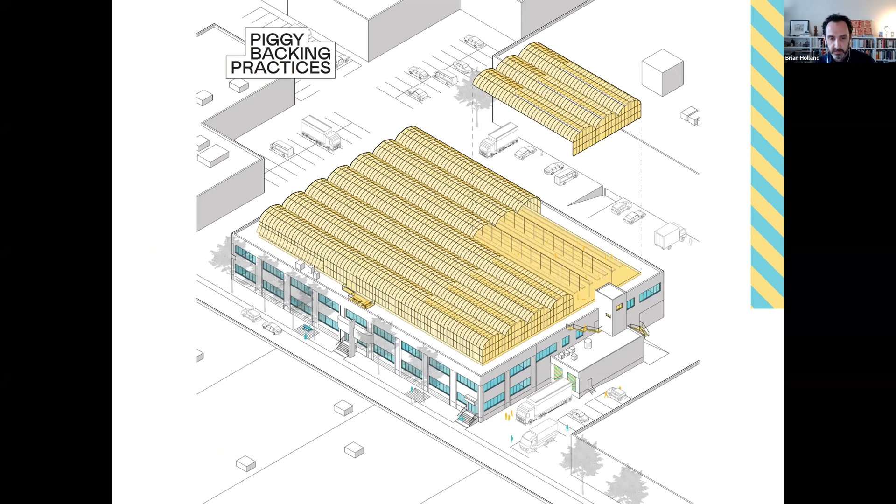Diverse actors forge surprising alliances as they negotiate access to space, resources, and opportunities in crowded cities. These, in short, are piggybacking practices: asymmetrical, multi-use propositions for anchoring socially or economically marginal activities alongside dominant ones. These practices are best described by example: rooftop agriculture, market rate condominiums with basement artist residencies, and student-senior home shares are just a few.

Just a few of the 21 case studies forming the basis of the online exhibition that accompanies the symposium. The exhibit and the symposium are part of an ongoing research project seeking to answer the following questions: To what contemporary cultural and economic pressures are these piggybacking practices responding? Who are the agents? That is, who are the piggybackers? Who are the piggybackees? And what kinds of tactics do they utilize?

Note that the case study drawings are illustrated with two colors to reveal the spatial particularities of these unique entanglements.

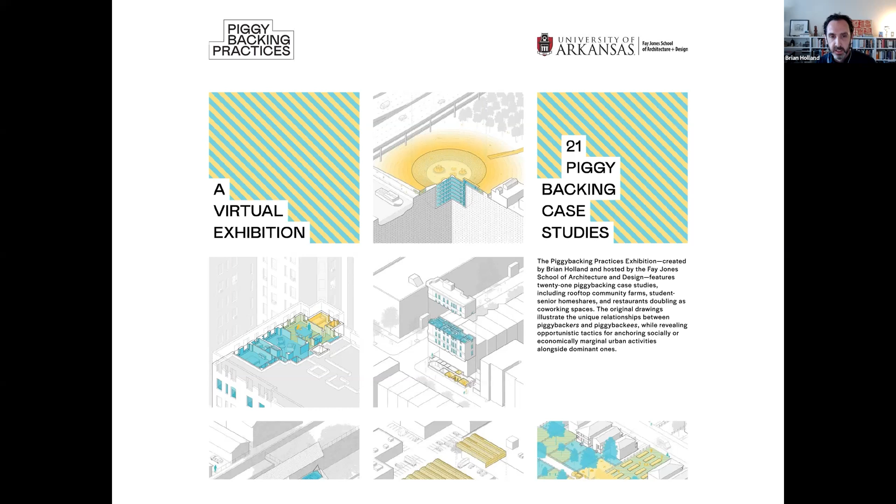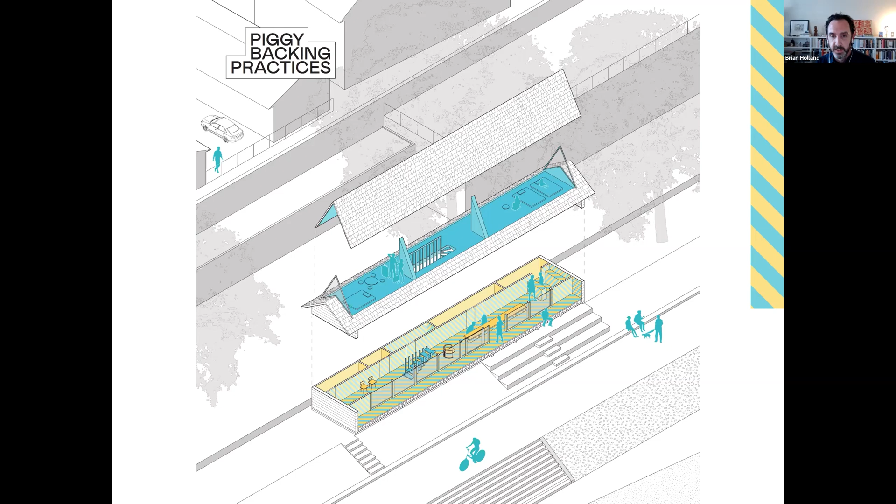Tactically speaking, piggybacking is an inherently opportunistic endeavor and is often born of necessity. Piggybacking practices have become increasingly common in the years following the economic recession of 2008. This suggests they are, at least in part, a response to the intensifying pressures of contemporary market logics. They are emerging alongside widespread increases in social and economic inequality.

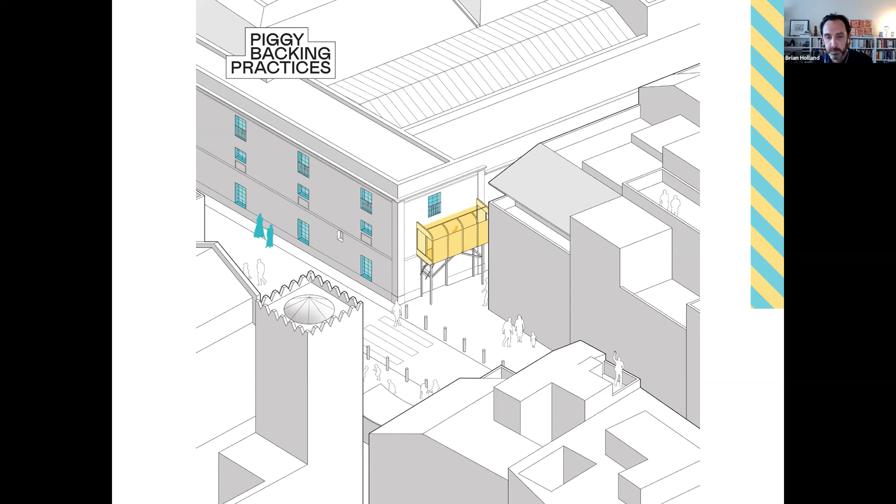Often lacking the necessary capital or land to build in a traditional manner, piggybacking practitioners operate tactically within the space of the other. They scan the urban landscape looking for opportunities in vacancy, waste, and un- or underexploited niches. These opportunities may be spatial, that is, existing in, on, or in between buildings and sites, but they may also be temporal, existing within the daily, weekly, seasonal, or one-time gaps between use and non-use.

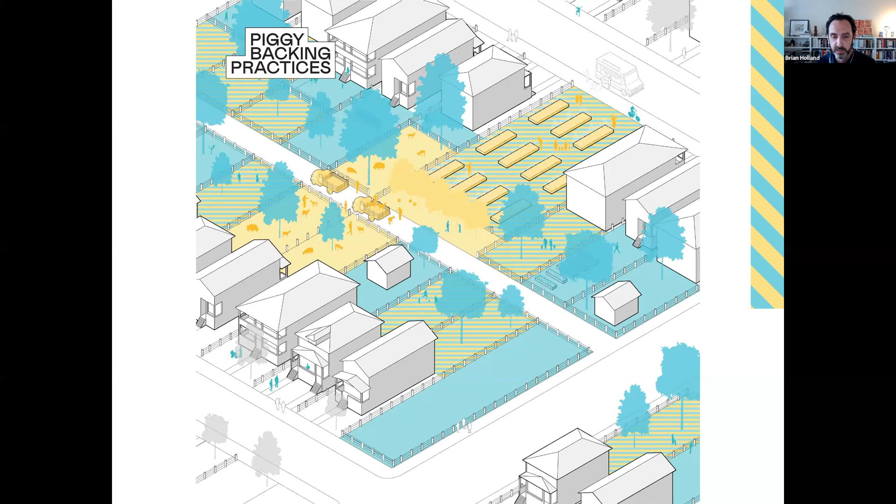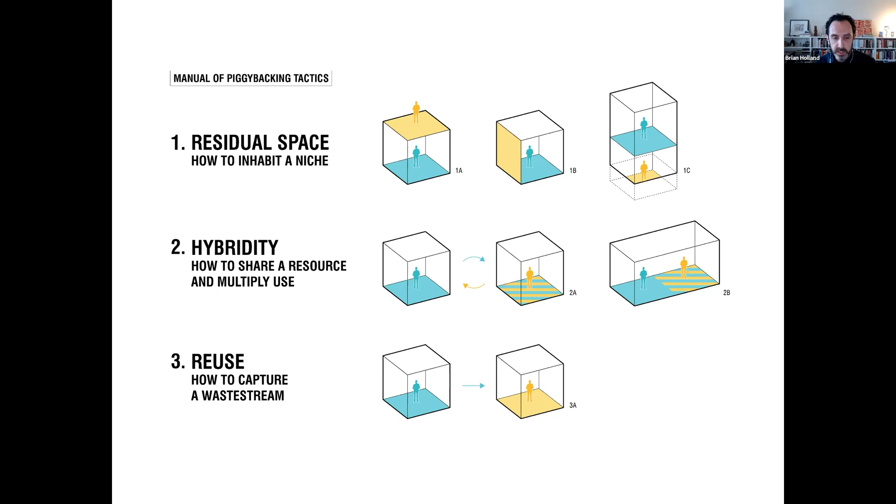In examining the wide range of case studies that make up the piggybacking practices exhibition, a common set of tactics becomes evident. The research suggests that in order to offset one program's disadvantaged position in relation to other, more traditional and more fully capitalized forms of urban development, piggybackers employ one or more of the following tactics: niche inhabitation, leveraging residual spaces on the top row; resource sharing and use multiplication, promoting hybridity on the middle row; or reuse, capturing waste streams.

The nature of any given piggybacking exchange differs greatly depending on which of these tactics is employed. And it's important to note that these are not discrete categories. Indeed, one or several of these tactics may be found in any given project.

But this initial research also points to larger questions, which are crucial ones for us as designers, planners, and advocates working in the built environment, and which I hope we might consider over the course of this symposium. To what ends are these piggybacking tactics typically deployed? In other words, for what larger strategic aims might they prove useful?

When, if ever, are these tactics alone sufficient to achieve these larger strategic aims? And what other practices might they be paired with in pursuit of broader goals, like the expansion of access and opportunity in the built environment?

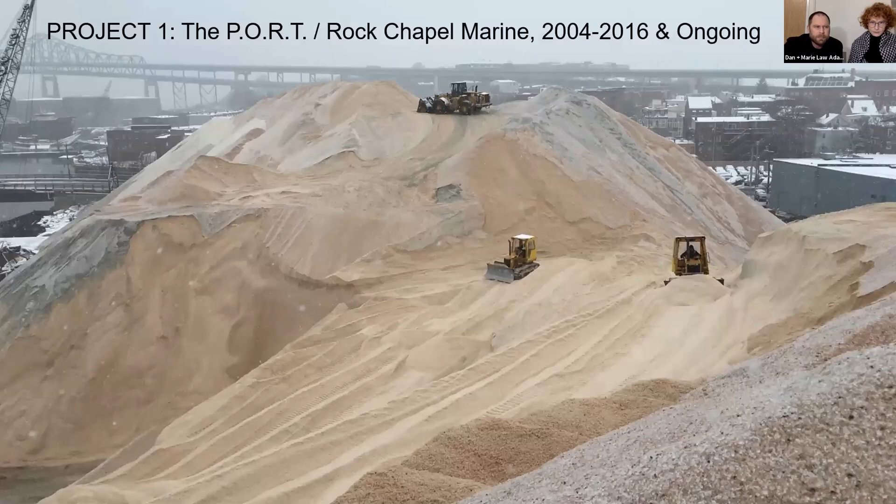So the first project we're going to talk about is what's often known as the Salt Pile, which is located just north of Boston, Massachusetts.

I think this notion of publicness is particularly interesting here. This is a private company and privately owned salt, and yet, of course, this has traveled the world over federal navigation channels. This is distributed almost solely to public Department of Works and highway departments. In this case, this is coming from the Atacama Desert in Chile.

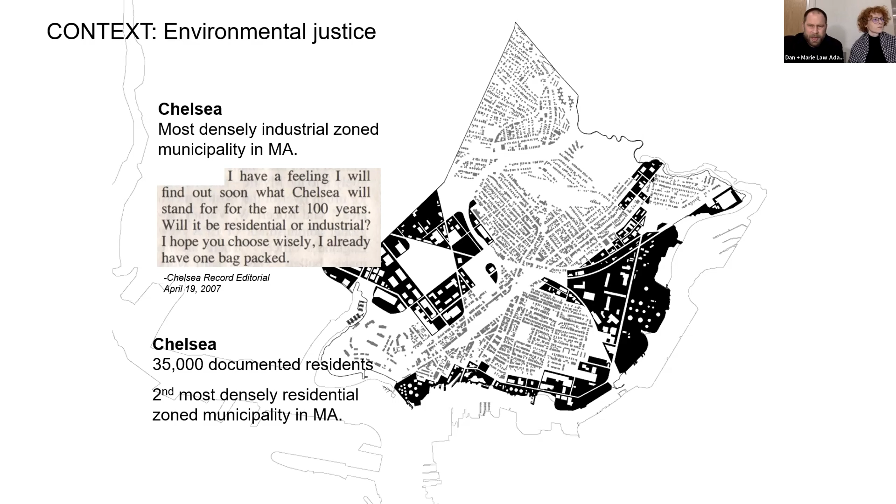It's located in a really complex, severe environmental justice community. It's one of the smallest municipalities in Massachusetts, under 2 square miles, and yet receives about 75% of Massachusetts petroleum product, as well as the vast majority of our salt product. There's this sort of competing hourglasses between 50% of the city being industrial and about 50% being high density residential, many living below the poverty line, many very recent immigrants to the city.

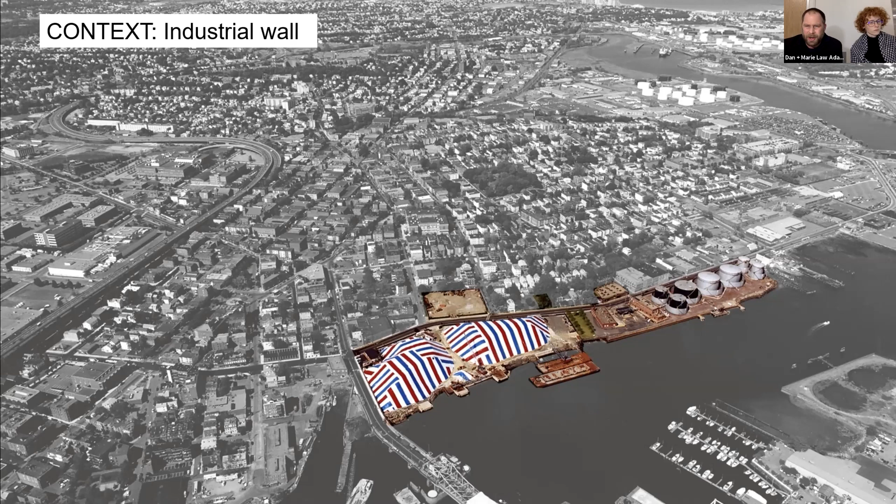That industrial density manifests itself particularly on the waterfront in a complex public circumstance where industry is really a barrier to the public resource of the waterfront. Here, what you see is the territory of the project that we're going to show, which is essentially a salt dock expanding into a former asphalt batching and jet fuel distribution terminal.

Marie cautioned me not to spend much time on this slide. It's the kind of slide you can spend a lot of hours on. The genesis of the project in many ways is a series of contradictions between regulations here at the local level, state level, and federal level.

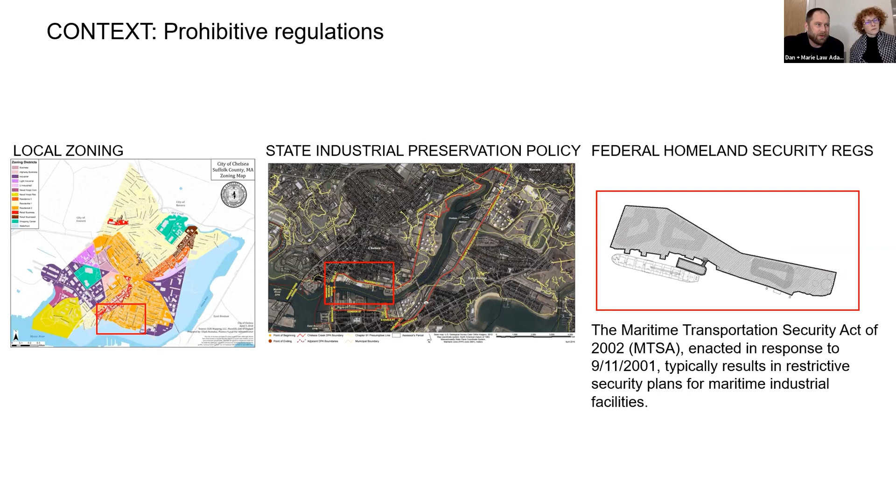At the local scale, it's really a restriction caused by the city's own response to industry, which is to try and prohibit future industrial development. They were so burdened by industry, they crafted a zoning code to prevent it, which directly contradicted state regulations that essentially require only industrial development here. And then you layer in contemporary challenges like federal Homeland Security regulations that make these sites entirely inaccessible to anyone without security clearances.

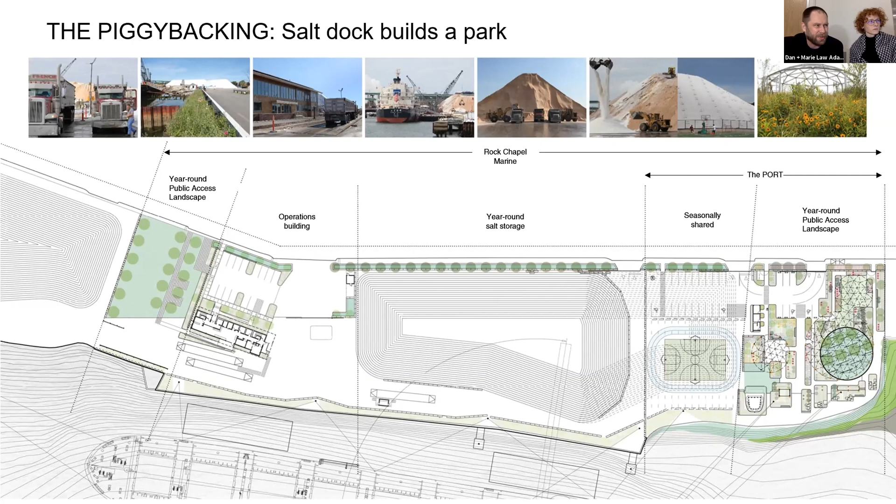The project, what we call the piggybacking, is really the design of a shared use landscape where we try to negotiate public access into active industrial salt operations. You can see on top a series of photos that give a bit of the flavor of the project.

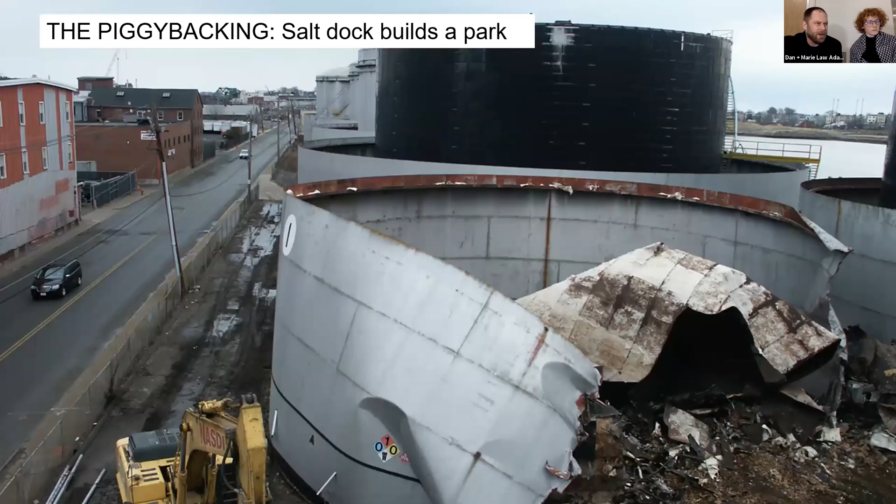There were a few tactics or approaches we should identify to understand the project. One being the recycling of industrial elements, which followed the demolition of the terminal — at the time, a mothballed asphalt batching and jet fuel terminal. Different components of that site essentially got reallocated. You can even see things like the bulkhead of the former oil terminal repurposed as infrastructure for mooring the salt vessels, along with the construction of the headquarters building and the salt stockpiles.

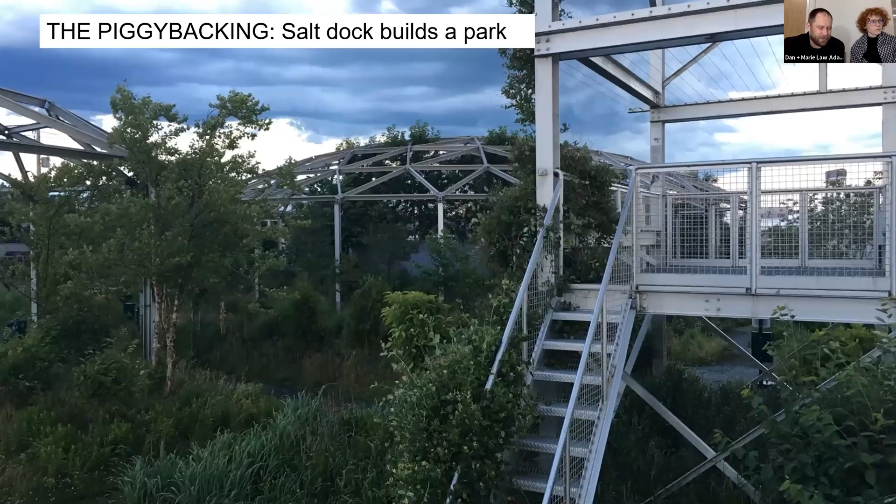One of the first tactics we identified, working through the regulatory agencies, was how to design the park essentially as industry and shape it by the functions of the industrial landscape. We produced drawings for state and federal agencies that basically tried to diminish the park in the eyes of regulators — to say, no, this isn't at all a park, it's a series of infrastructural moves that add up to form a park.

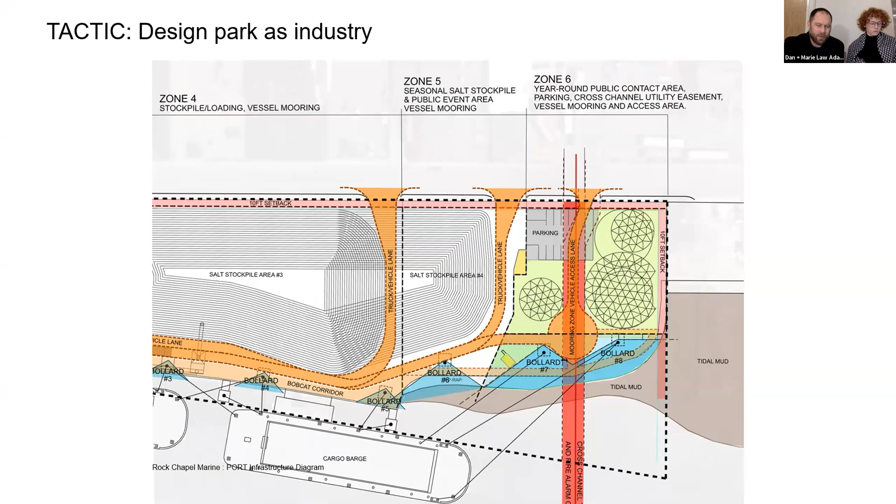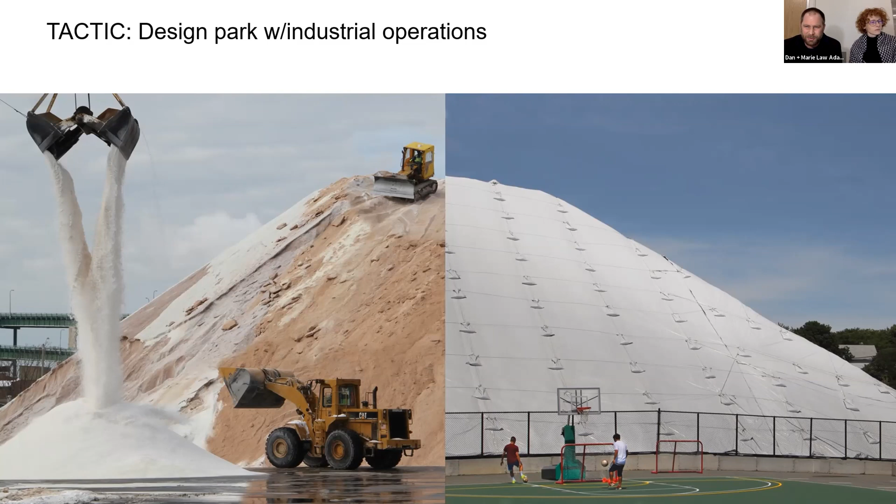Another tactic we looked at: industry is often just generically referred to as 'industry,' ignoring all the particularities. That's something I really appreciated in Claire's presentation — she doesn't do that. The salt pile has a very specific set of parameters, some of which can be capitalized on. Salt in New England is used to de-ice roadways, so it's very active in the winter months. Outdoor parks around here are less used in winter and a lot more used in summer, which creates a nice seasonal tactic.

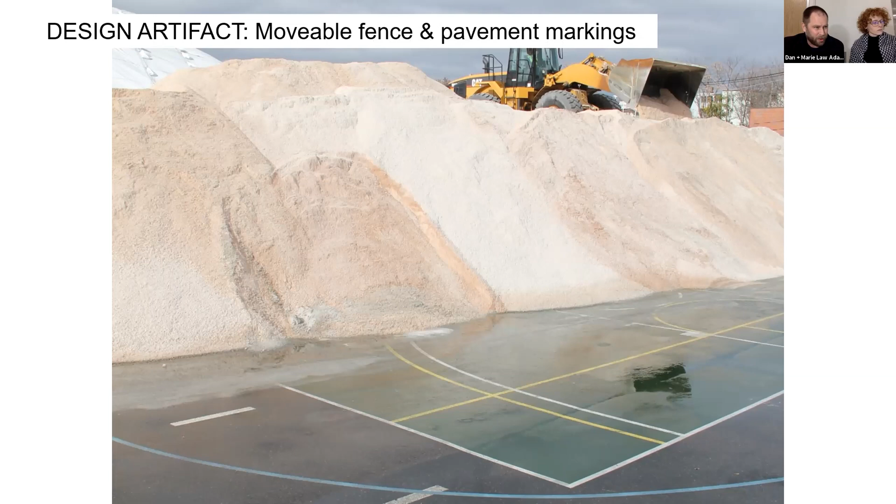Part of the design was to allocate an area that, from the federal and state regulators' perspective, still served its industrial function, but could be softly treated with lightweight infrastructure to condition it for public uses when not being used by industry. So here you see what's become an annual tradition, where the only waterfront park basketball court is annually covered with salt, and then in the spring it's reconstructed through design artifacts, which are movable fences and simple pavement markings.

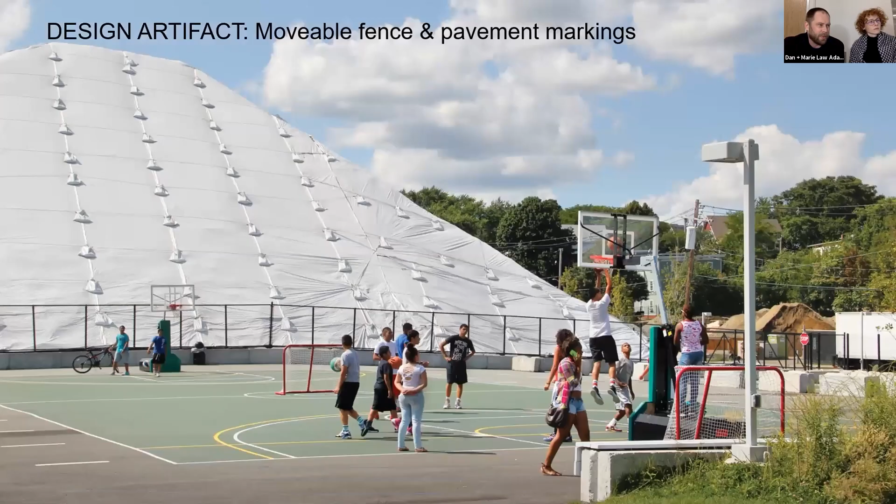And I should comment that this piggybacking, tactical approach is really the first time that a public park has been added to the public realm, certainly of the waterfront in Chelsea, for about 100 years.

It was sort of the first opportunity to crack public space into the industrial waterfront. Some of the other artifacts we've really focused on in our work is realizing there's not just physical artifacts or physical tactics in the site, but also a series of artifacts that often have to negotiate the more regulatory or policy-based domain.

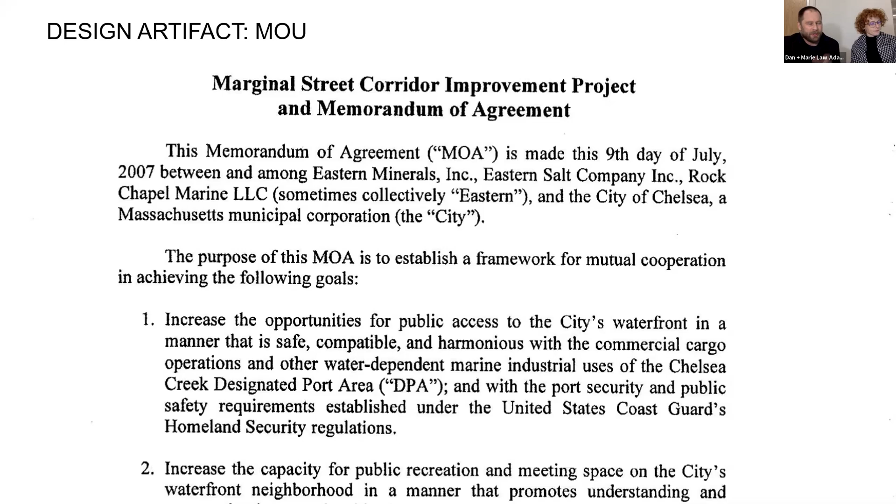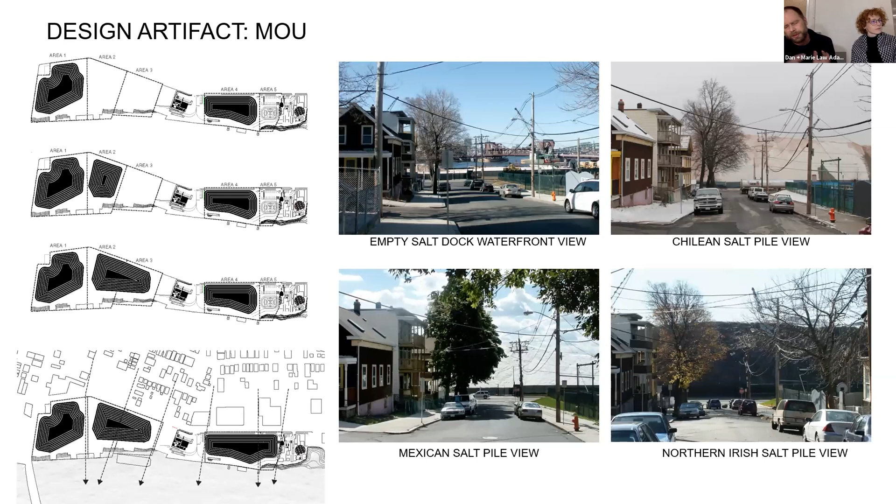A common device we've worked through is these various forms of contracts that regulate the relationship. In this case, a memorandum of agreement between the city and the industry, which outlines relationships almost outside conventional zoning types that can govern the complex ecosystem between industry and the city. It outlines things like salt stockpiling strategies, both to open the site for city access and to preserve views, particularly in summer months.

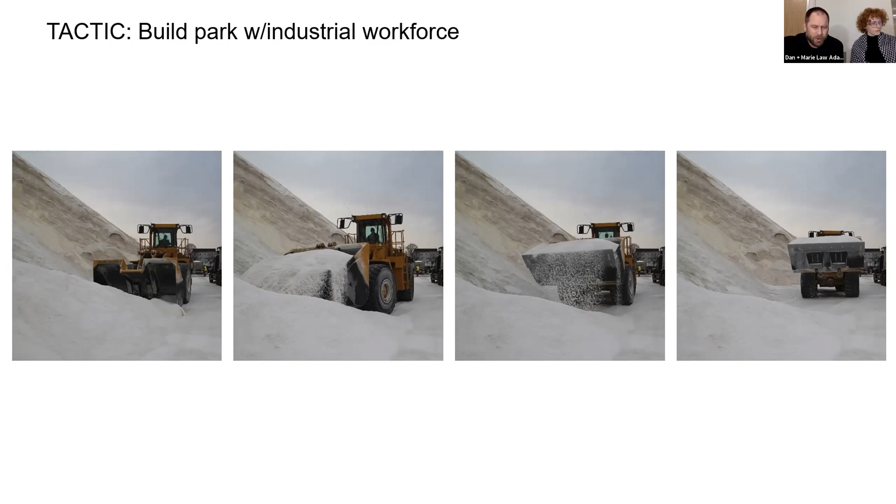Another tactic we've learned through these projects is to translate not just the physical space or regulatory domain of these industries, but the working operations of the industry themselves, and in some ways the workforce and skill sets. In this case, a salt dock has a ton of useful equipment and high capacity equipment, as well as very knowledgeable and capable labor.

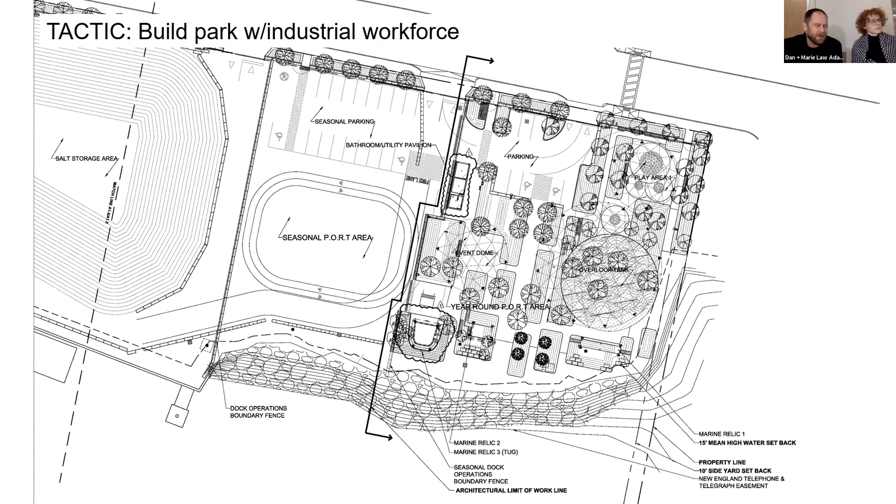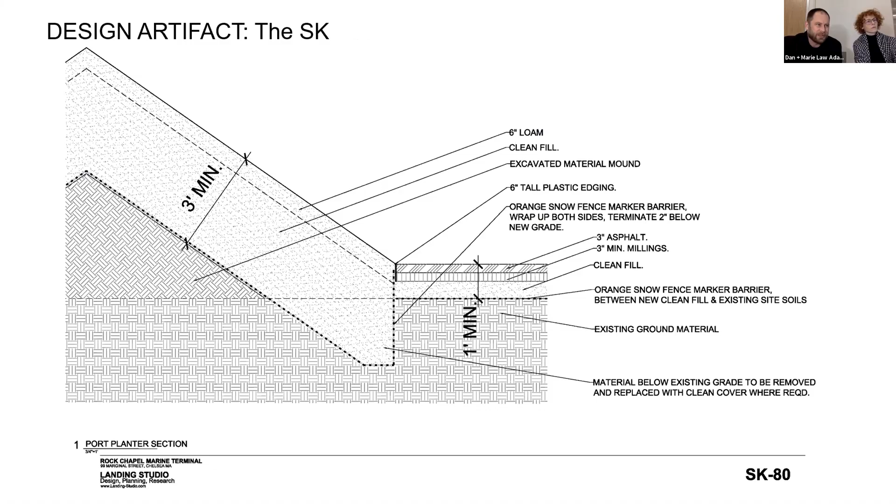An outcome of that is even a modification to typical drawing standards. We often find working in this way, we have to move away from conventional drawing sets and into more of an SK model of continuous sketches.

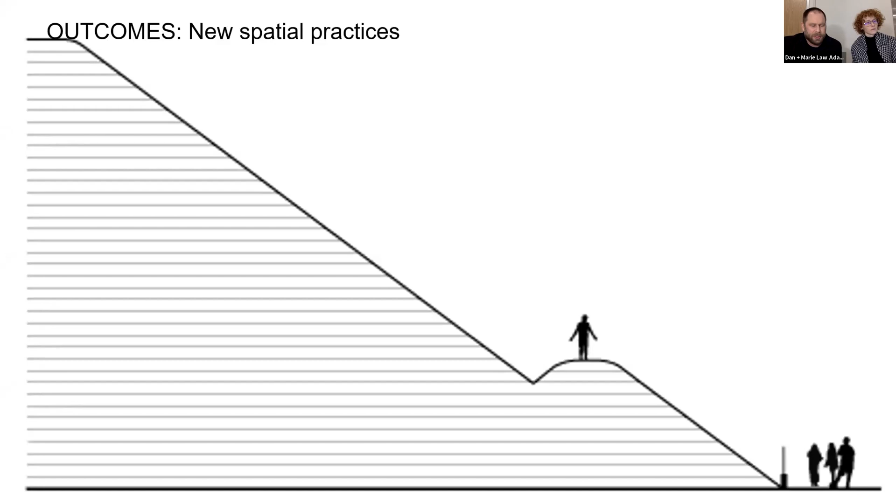I think I'll quickly wrap up this project by saying, working in this way of truly embedding industrial operations with the public domain has led to all sorts of ongoing outcomes. As part of that park development, we had built an amphitheater in a former oil tank farm. It wasn't long before the theater companies working there started seeing the salt pile itself as a resource, and the workforce capacity of the labor force and their seasonality made it possible to start using the salt itself for theater construction. So now an annual tradition of the salt company is to build stage sets for the theater production company.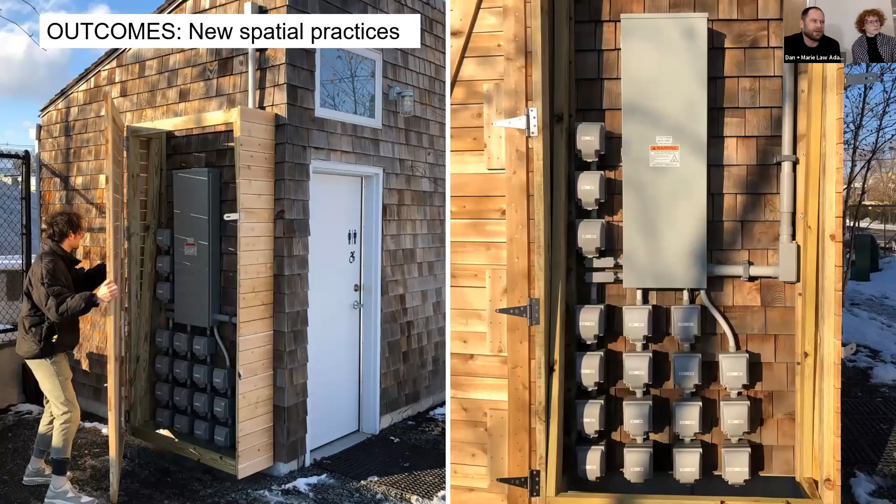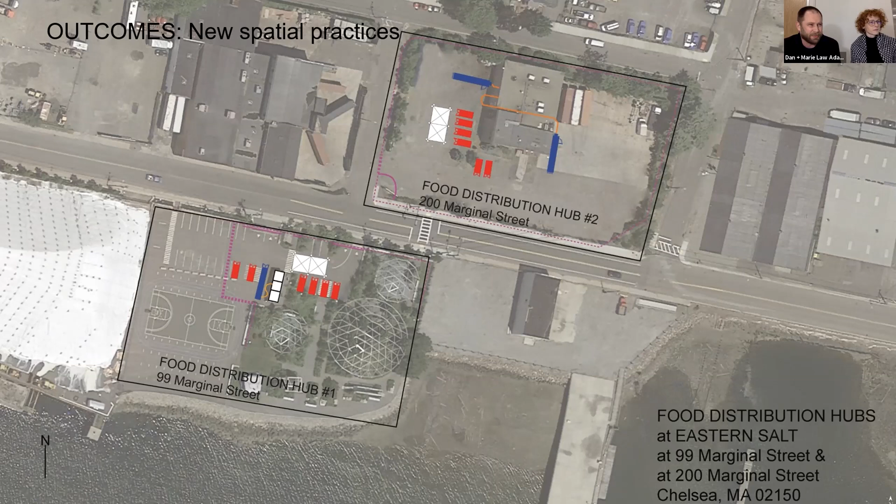That naturally spins off all sorts of new partnerships. A couple years ago, we had to do a very robust electrical infrastructure installation in this public park feeding off of the dock's infrastructure. That supports all sorts of events now, but even most recently, when the city of Chelsea was trying to figure out where to set up their food distribution hubs, where could they get power for refrigeration units, the simple infrastructure in the park, as well as the reconceptualization of that industrial area as a public space, opened that terminal for that use to distribute food to the city.

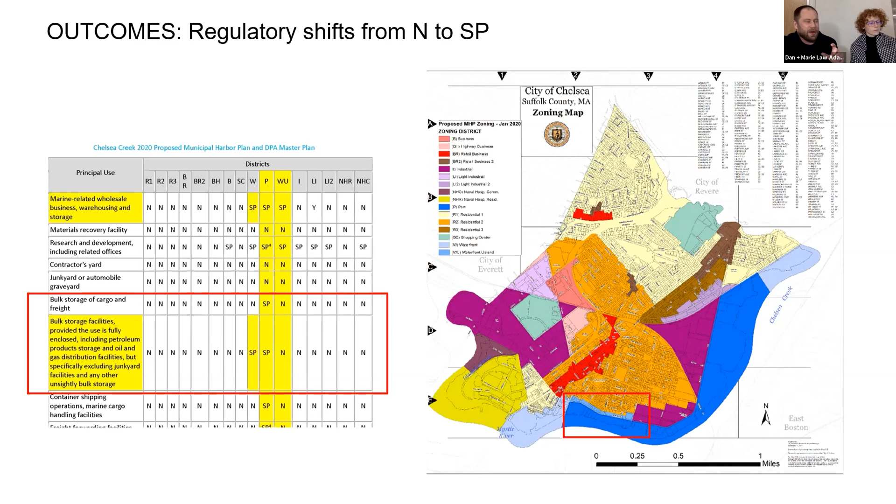Most interestingly to us, the most recent outcome has been a shift in the city of Chelsea, particularly as they look at their future, trying to maybe limit the rampant gentrification happening in this area by reconsidering the future of industry in their city. Very symbolic to us is the change in their zoning code from industry being an excluded use to now being, you can see, from N to SP, a special permitted use, meaning they are willing to bring industry to the table and negotiate it as a positive neighbor as long as it can be negotiated in the city.

The context and the conditions of publicness here: there's severe neighborhood fragmentation that occurs as a result of this interchange being located where it is.

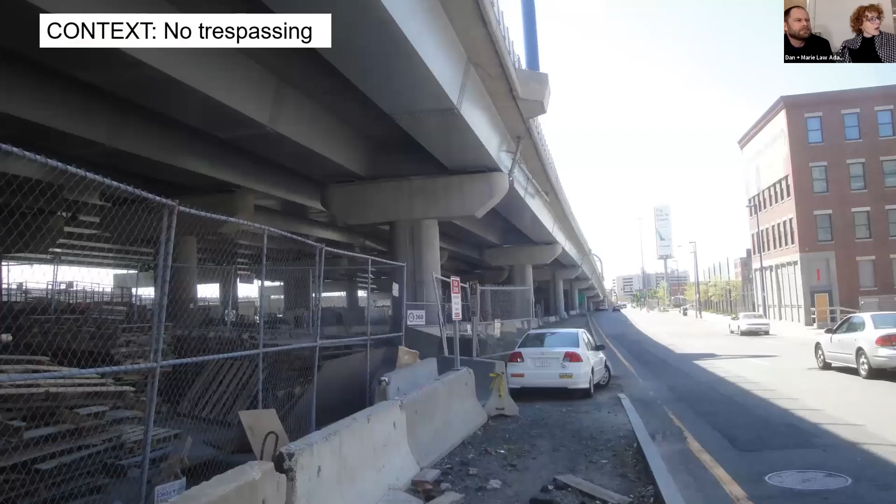No trespassing. The state transportation agency who controlled the land underneath the interchange had their solution of prohibiting access to the space, but it was not working. The area became known both for legal and illegal dumping as well as physical violence.

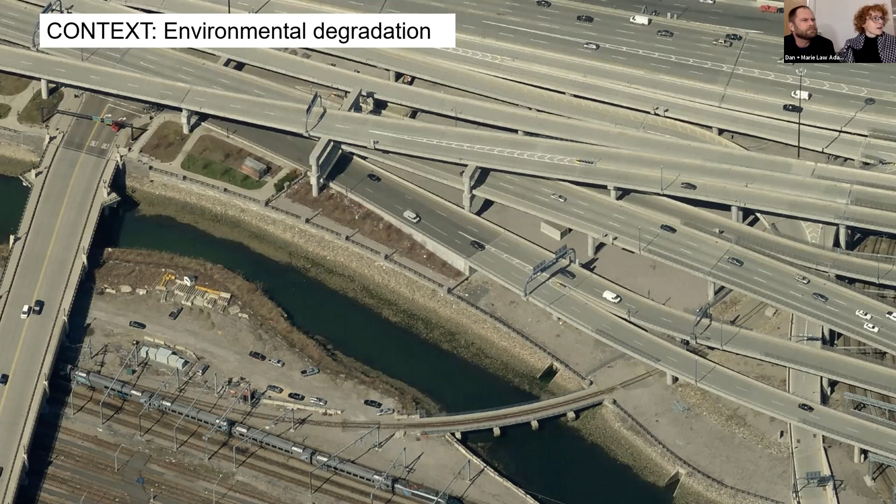And then environmental degradation. The area is almost entirely impervious. All of the stormwater is untreated, flowing directly to local waterways and the Boston Harbor. And of course, there's enormous urban heat island potential here. All of this is really very common to highway sites everywhere. There's almost nothing remarkable about it at all.

The piggybacking tactic or project here is that the DOT adds a park under the highway. So the park involves a stormwater management landscape that treats the runoff from the highway before it enters the harbor, shared use pathways that connect the neighborhoods together, flexible recreation and event spaces, and a street art gallery. The main tactics in this project are very similar to the first project: to design the park here as transportation infrastructure.

This arose out of the particular conditions of the project. The client, or the proponent of the project, was the state transportation agency. There was no benevolent billionaire donor, no private foundation in the picture to build the park like there is with many other highway park projects. Departments of transportation, of course, can build, operate, and maintain transportation infrastructure. They typically have relatively large budgets to do this work, but they cannot build parks. That's not within their budget policies.

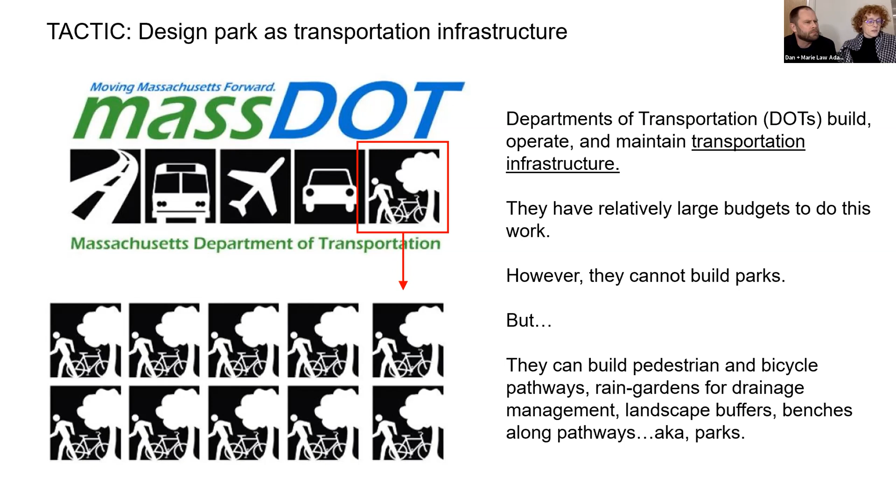So the project became how to take what they can do—build, operate, and maintain infrastructure—to build a park out of that mission. In other words, how can a park be made of pathways, green stormwater infrastructure, and landscape buffers?

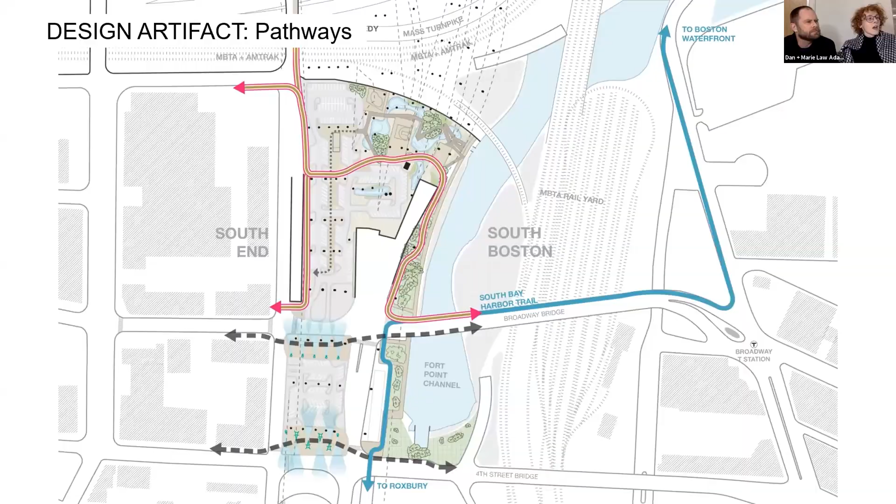So we start with the first kind of design artifact, which is the pathways, the transportation infrastructure, connecting across neighborhoods with shared use pathways—faster pathways for commuting, and then slower, more meandering pathways that bring access for people to the stormwater landscape. The second kind of major design artifact here was to reroute the pipes.

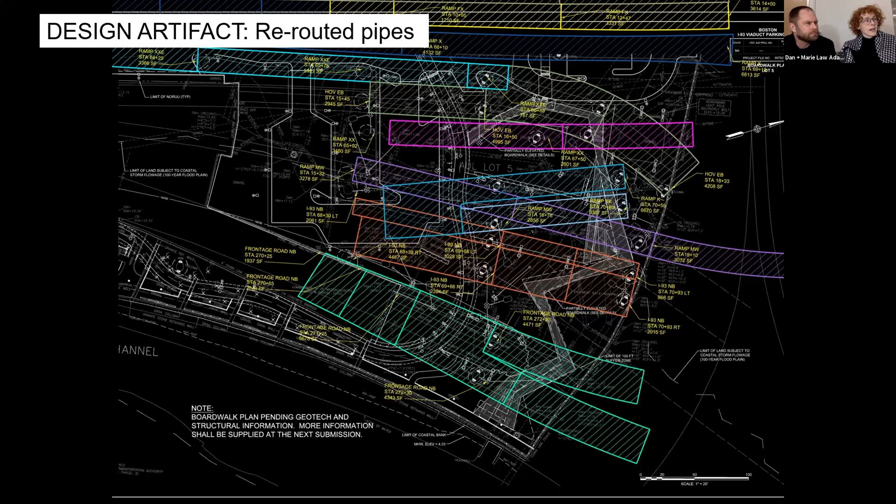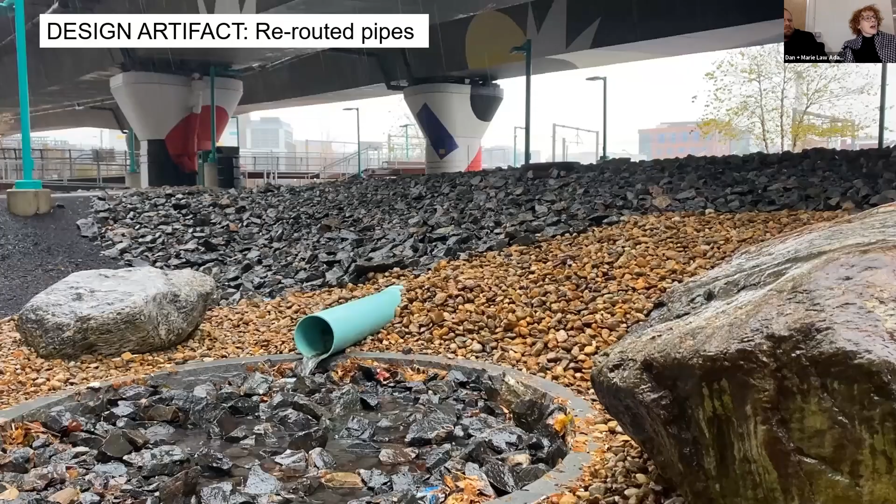So how to create a landscape out of green infrastructure. You look at all the catchment areas. The highway itself is basically a very enormous catchment area for stormwater drainage. Typically it goes into an underground network of pipes and then discharges directly into the waterways. We disconnected the pipes through the project, which is what you're seeing here, and then rerouted those into the landscape to create a drainage surface.

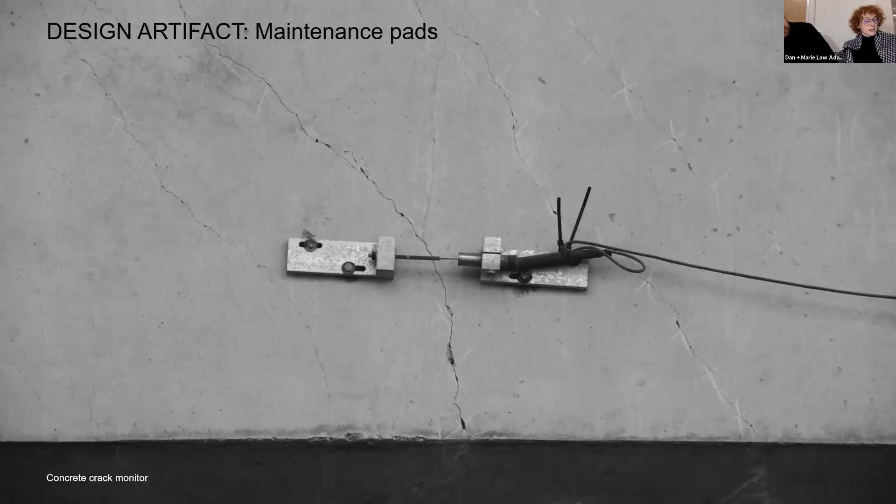The second design artifact is the maintenance pads—sizing and distributing paved areas throughout the stormwater landscape to support maintenance equipment access. These are basically areas where boom lifts can be located in order to support inspection of the concrete infrastructure and to do repair work.

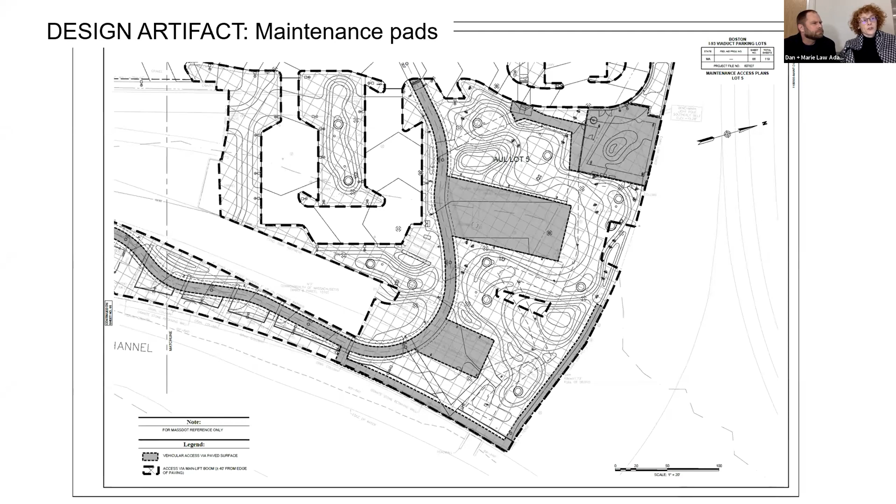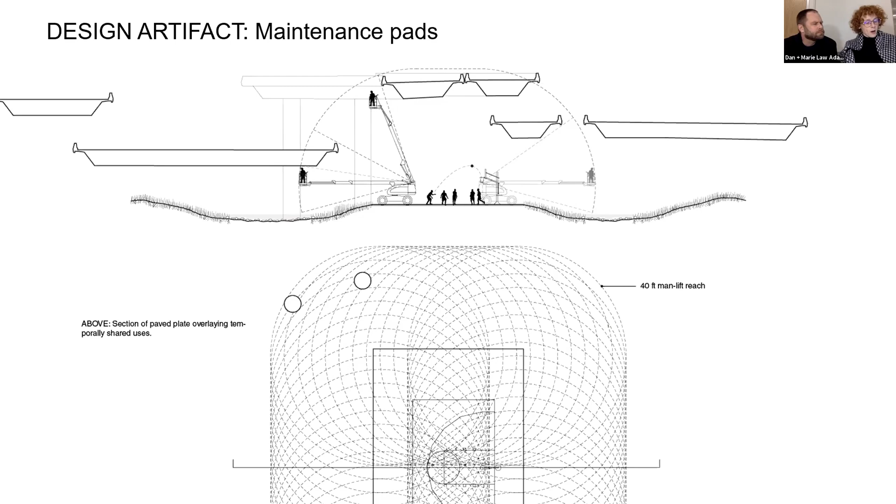These are areas that can also double function as recreation spaces that are placed throughout the stormwater landscape.

In this case, another important piece of the project for its post-construction life was a lease agreement, which is a way of bringing in a private partner to the park, and also a tool to activate the space and bring in elements that the DOT itself could not implement within their budget and policies. This enabled a private partner to put on events to help activate the space, as well as pre-vetted mural opportunities for the infrastructure.

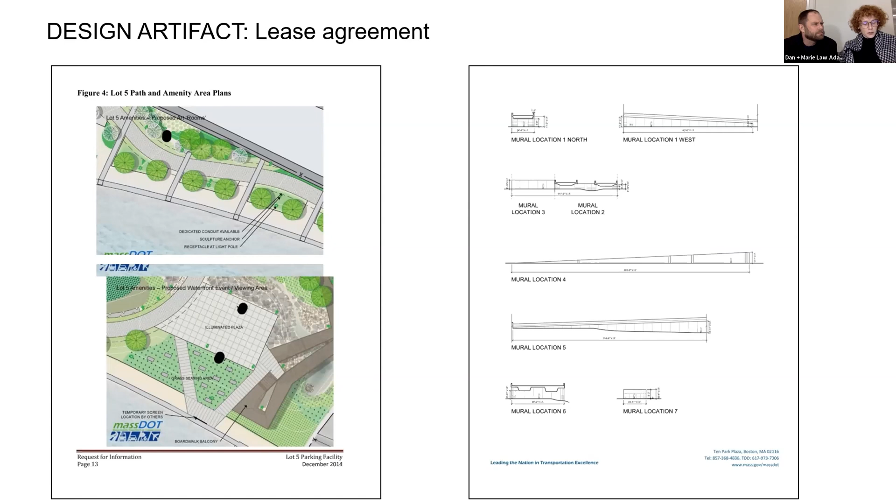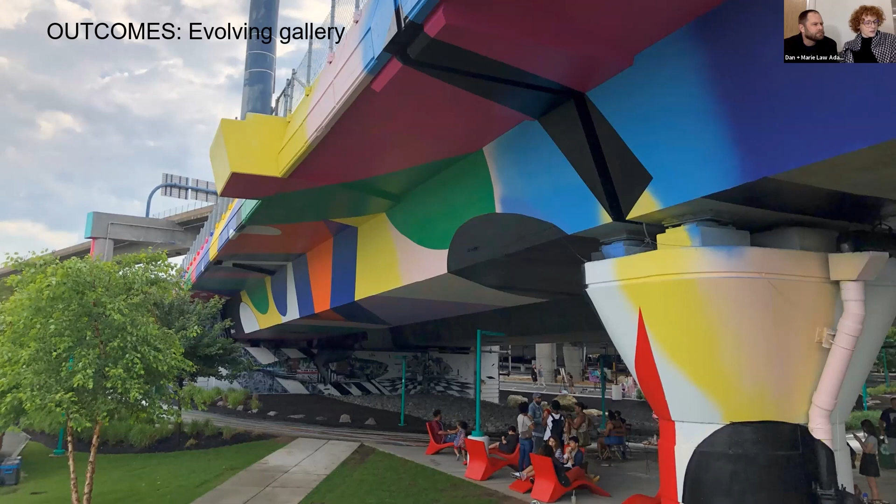Some of the outcomes were that this became a kind of constantly growing street art gallery, curated by an artist-owned organization and featuring local artists.

Another outcome that's really interesting about this is new standards within the transportation agency. Working within the structure of a transportation agency that's constantly building, maintaining, and repairing infrastructure, they essentially manage a huge living archive of specifications and construction details.

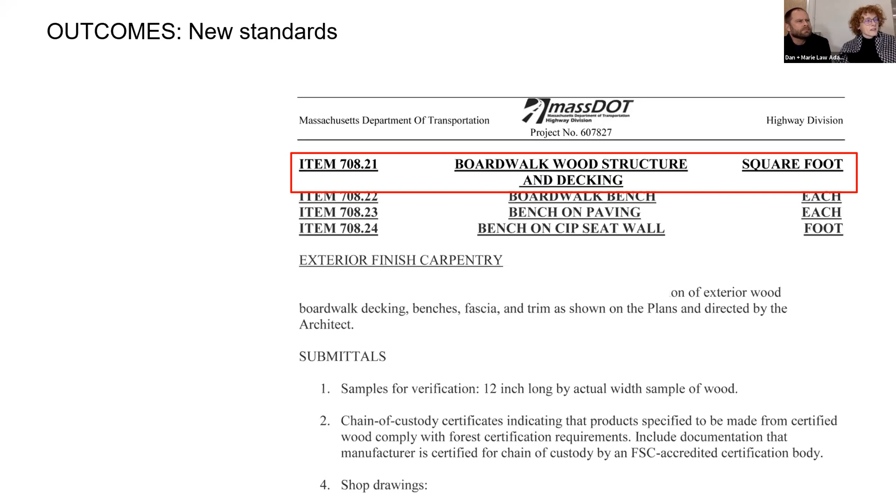So the opportunity in this project was that once a standard detail is developed and approved for one project, it can be adopted into this archive and used on other projects.

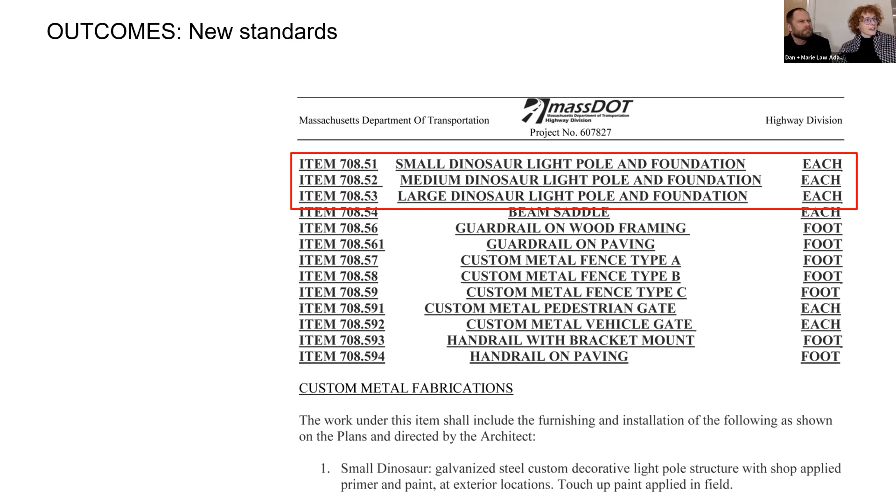We didn't talk about this piece much, but we're proud that we got a new spec into the DOT system, called the dinosaurs, for one piece of the project that was a new kind of lighting scaffold that you see here.

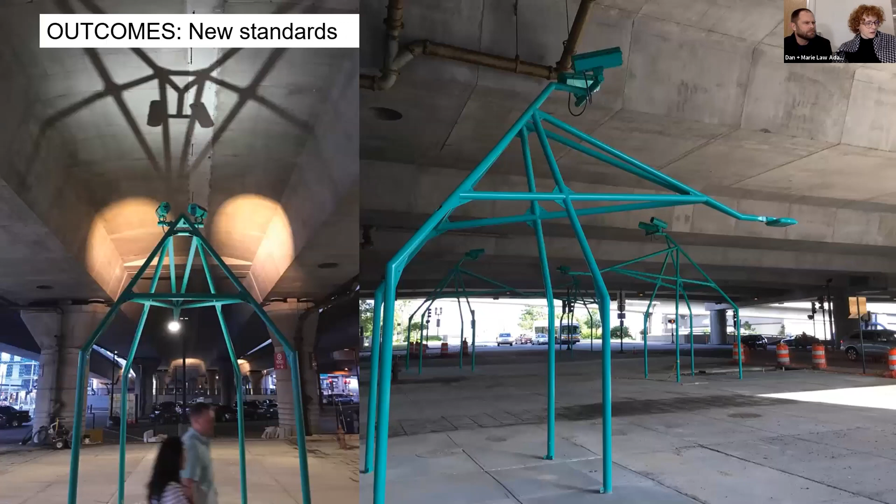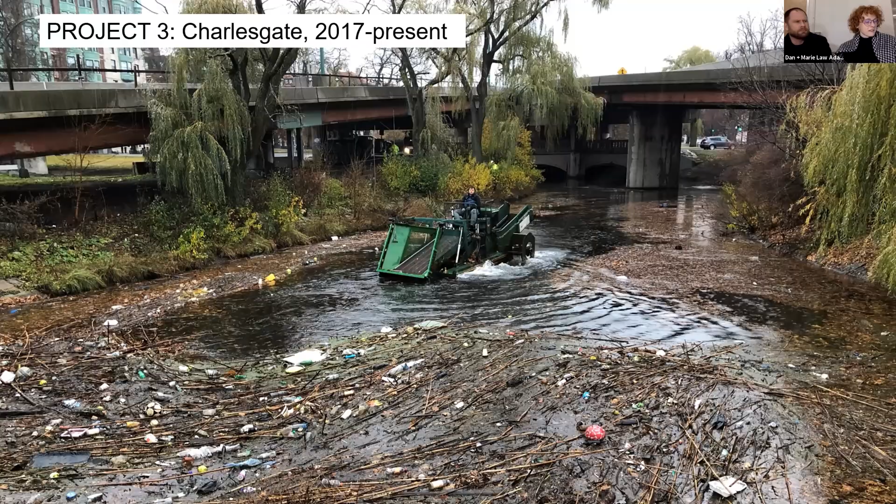The last project I'll talk about is still in a design phase right now. I'll start again with the phases of the state of publicness on the site. This is in Boston, the gateway to the historic Emerald Necklace, Olmsted's famous park system.

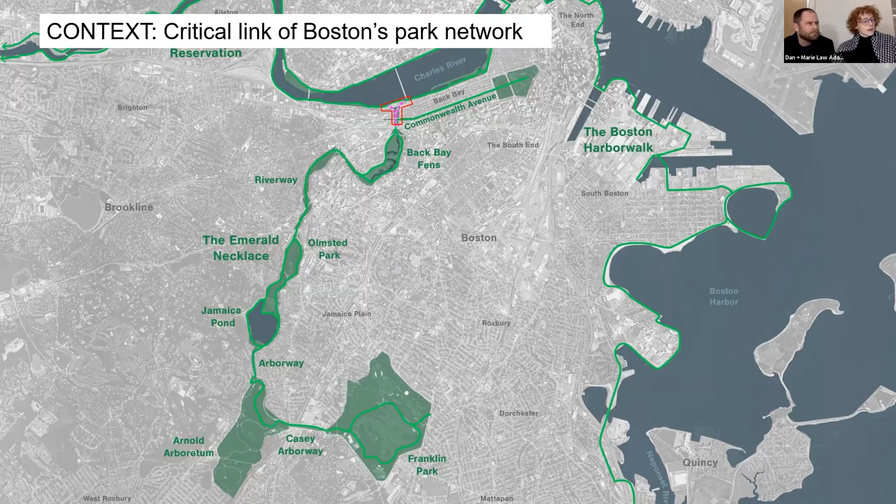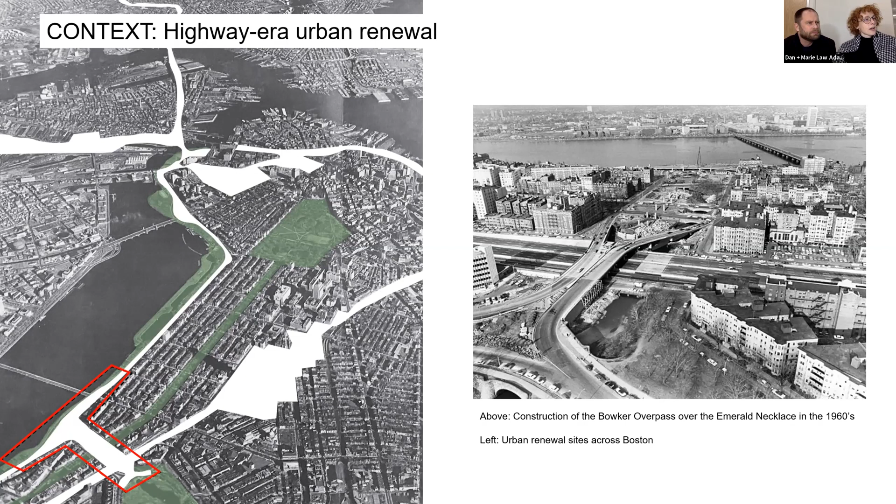Another context point is that a bridge creating this disconnect between the two landscapes is at the end of its service life. Finally, all of the roadway projects disconnect Boston's river ecosystems. You can see in the picture how the Muddy River now interchanges with the Charles River through a series of four concrete pipes.

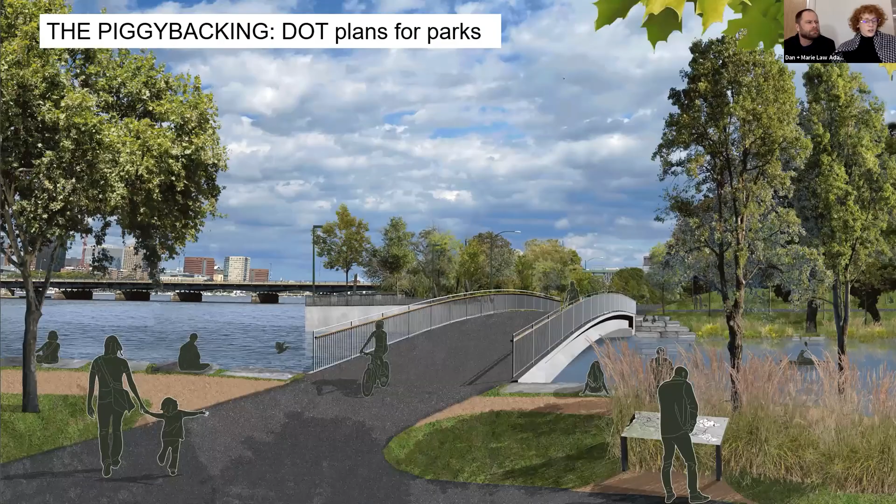In this project, to differentiate from the last one where the DOT simply adds a park under an existing highway, the difference here is that the transportation project replans the whole area to prioritize non-vehicular connectivity, park networks, and ecosystem connectivity.

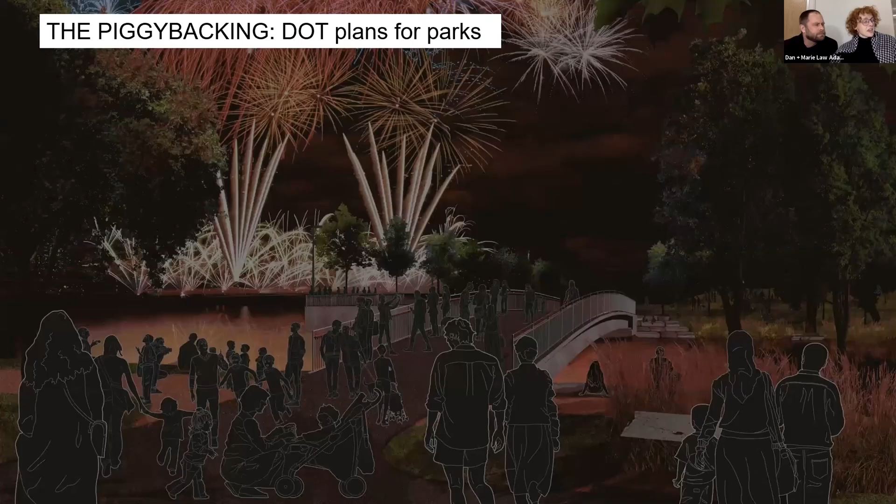The key tactic in the project is that it started with a grassroots community-led effort. Residents banded together with water quality advocates, open space advocates, and transportation advocates to develop a plan through a year-long visioning process, which led to getting the attention of the state transportation agency, who needed to replace this roadway infrastructure as it was nearing the end of its life cycle. The transportation agency adopted the design and our team for this project.

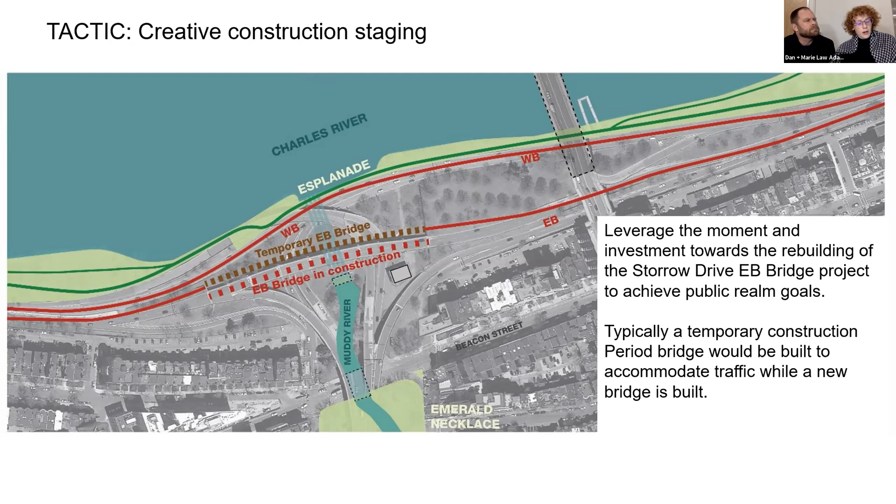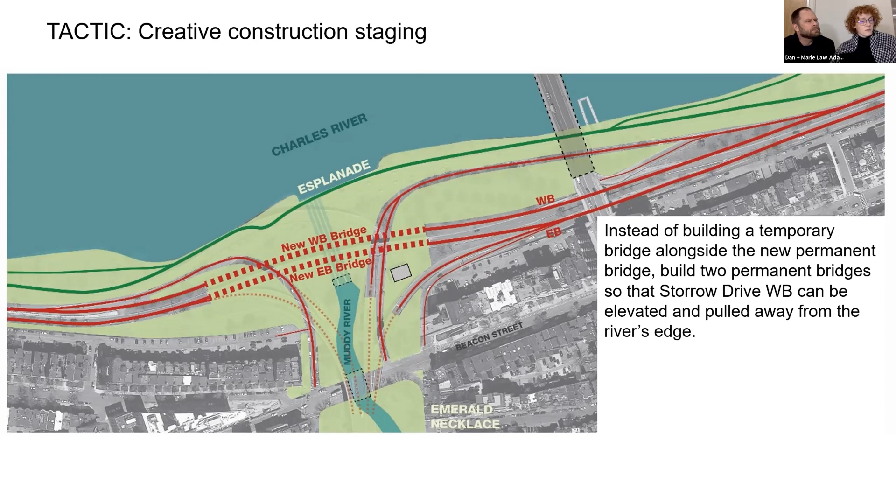The second really important tactic that unlocked the potential to create new connectivity is, due to the bridge engineer on the project who wanted to rethink construction staging. Typically a project like this would involve building a temporary bridge to divert traffic and avoid shutting down roads during construction. The idea here is that for the same price, a temporary bridge can be made permanent, allowing both roadways to be lifted up, creating the opportunity to daylight the river and reconnect the park systems.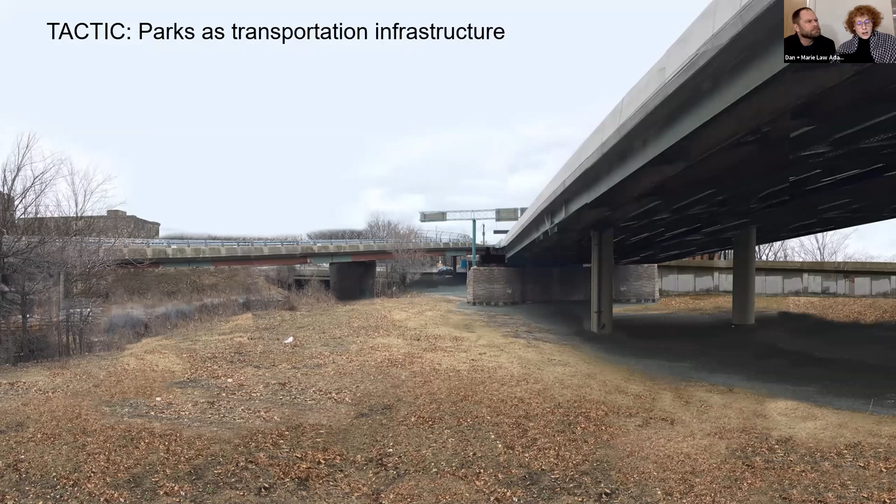The other tactics I won't go into because they're basically the same as the last project I showed - bringing in green stormwater infrastructure as a public realm landscape amenity, and designing for maintenance access as a way to produce recreation spaces and event spaces.

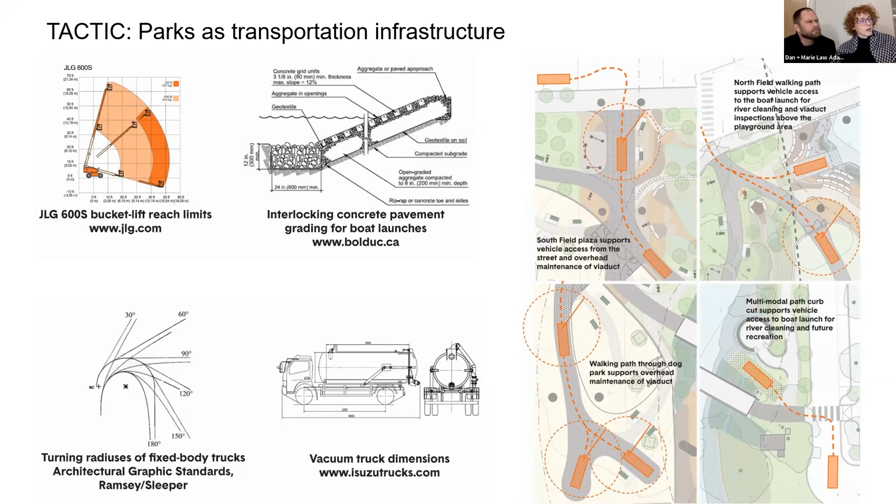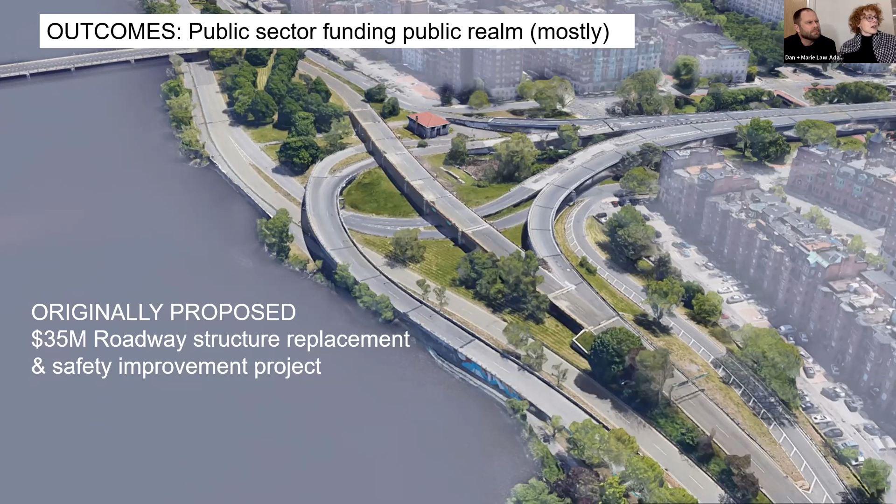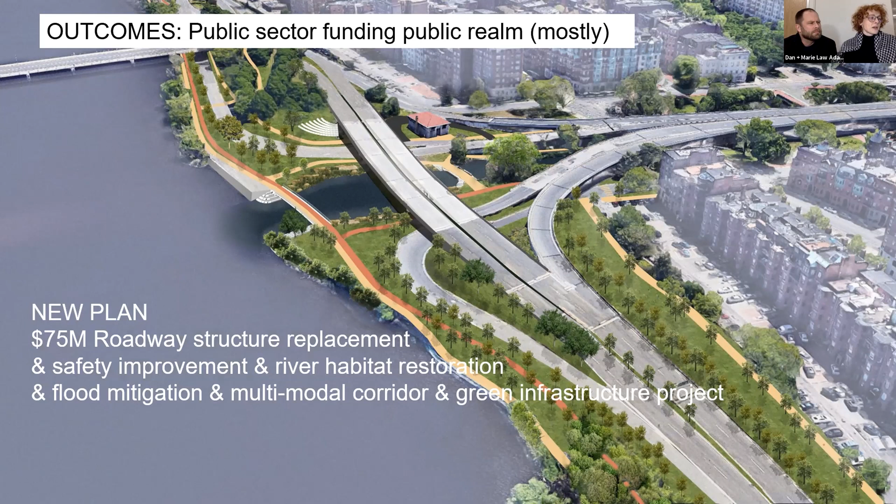In the outcomes of this project, we find that this is an example where the public sector is actually funding a public realm project for the most part. The original proposed bridge replacement project was a $35 million roadway structure replacement project. That grew into a $75 million project involving not only the bridge structure replacement, but also habitat restoration, flood mitigation, multimodal corridor connections, and green infrastructure.

So we want to close by sharing a few reflections on the projects. Some things that come to mind are the difference between planning and inserting - just between those last two projects - planning new infrastructure in concert with the public realm versus bringing the public realm into an existing infrastructure space, and what different outcomes come from that. Community-led practices versus infrastructure-led, and iterative versus discrete design action.

So what are the times when an architect is able to be involved from the planning stages all the way through the ongoing life cycle of the place, and how that can inform the durability of the piggybacking relationship. And that's all we have. Thank you.